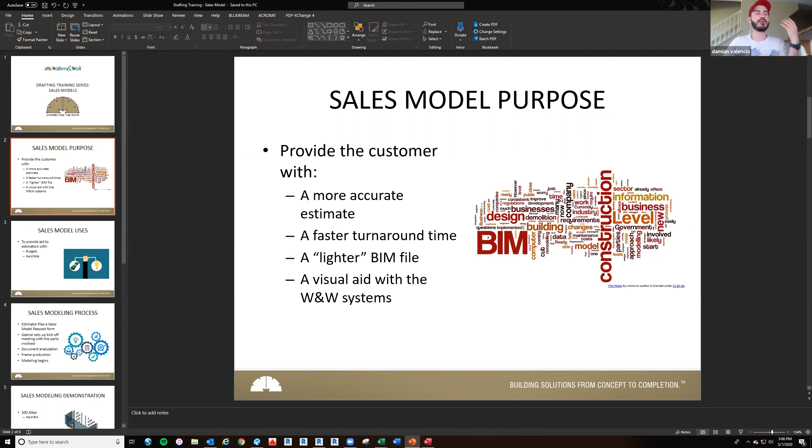Some of the sales model uses I've done: we do this to help estimators with budgets and hard bids. The difference between these two - usually for budgets, right now Saad and myself are working on one for Flower Mart, they just want to know what the price will be. So they care about the square footage per system, the glass and how much square footage, the metal, and all the metal panels and stuff. They just want a raw number.

So we don't really dive into the detail too much. The next one is hard bids - this is the example I'm going to show you. This is when we are bidding for the project, and the architect already has most of the design calculated, they already know the overall idea of the building, so it's almost finalized by them. This is the one we're trying to aim to be better at, because we want to get those jobs. We want to be as accurate as possible and show them that we're capable of giving a good quality product from the beginning, not just at the end.

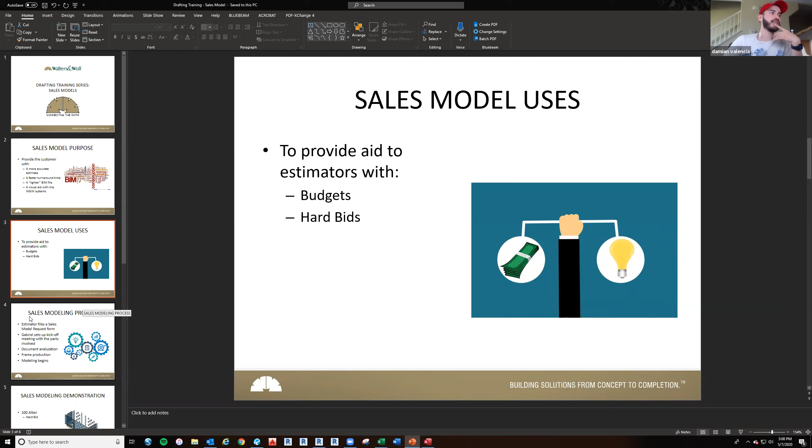This leads to the sales modeling process, which is the process we follow for the sales model. First, the estimator files the sales model request form, and then Gabriel sets up a kickoff meeting with the parties involved, usually a PM, the estimators, myself or whoever else is working on it, Gabriel, and the whole sales team, Amy. We also try to incorporate Jumpstart, whoever is working on those details, because we want to work together from that moment, so we can identify problems ahead of time that we can easily fix later if we find them early.

Then the next thing we do is document analysis. This is where we dig deep into the drawings and make sure we're checking every elevation for any frames that we might need to produce or any frames that we already have in there.

I'll show you an example, going over the steps. The next step is frame production, where we identify all the frames we have and the frames we still need to create. This is where we have our sales team create these frames if necessary, and then we can continue to model.

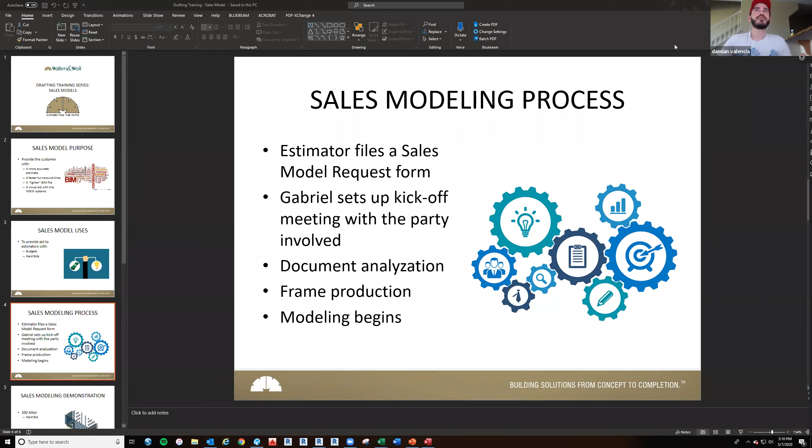Let me show you a quick example - this is 100 Altair. This was a hard bid, but the project's already ours. So here's the 100 Altair 100% DD. This is where we go elevation by elevation and identify the different units that we have.

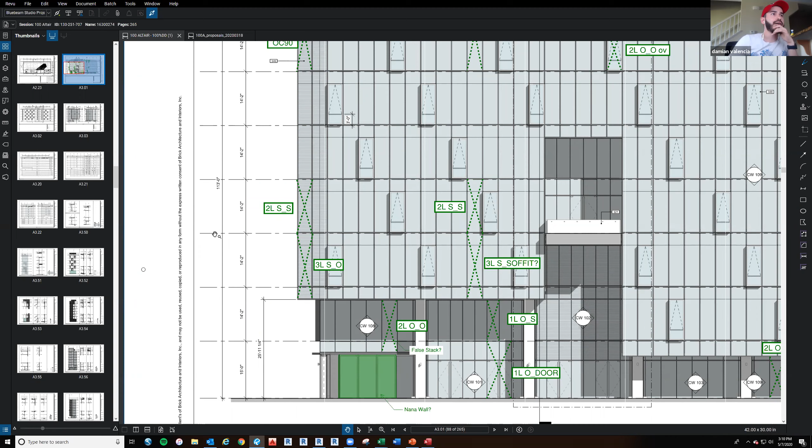For example, here's one I marked up. We identify where we think the stack joint will be, then we cross the units and call them by these names, which makes no sense unless I explain. This is a 3 light stack over opening - we have a stack joint up here, and then an opening down here. This is a 1, 2, 3 light.

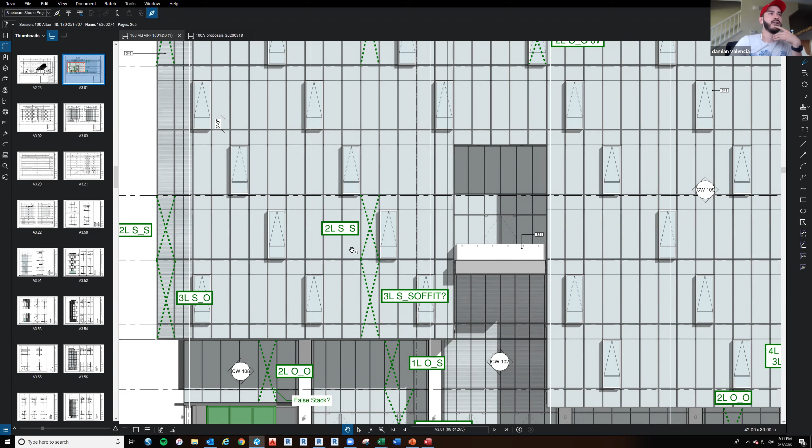There's another one here - 2 lights stack over stack. There's a stack joint up there and a stack joint down here, and then we have 2 lights, 1 and 2. We also go around the whole building and try to find as many as possible. We're probably not gonna finish all of them - we'll probably identify some later once we dig in and start modeling.

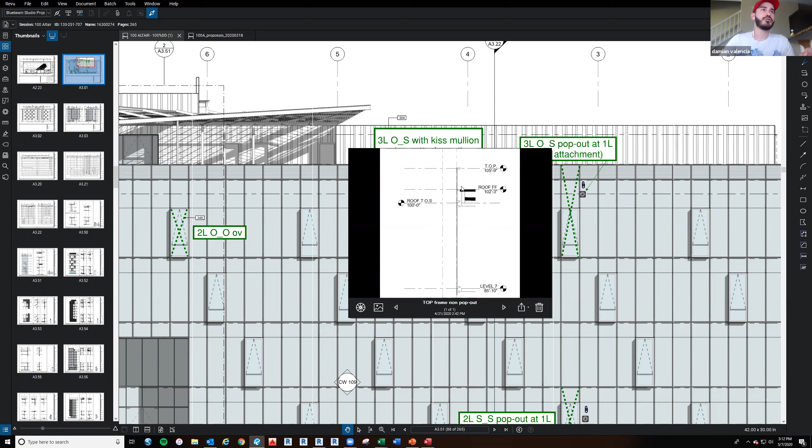An example was this one right here. At first sight, I thought this was a separate light, but once I dug into the proposal drawings, I found out this is actually a kiss mullion. So I put this as a 3 light opening - there's an opening up here and a stack down here with the kiss mullion. Since this isn't a typical frame, I try to include attachments of the architect's profile section view, which shows there's a little kiss mullion right there, and this light runs through.

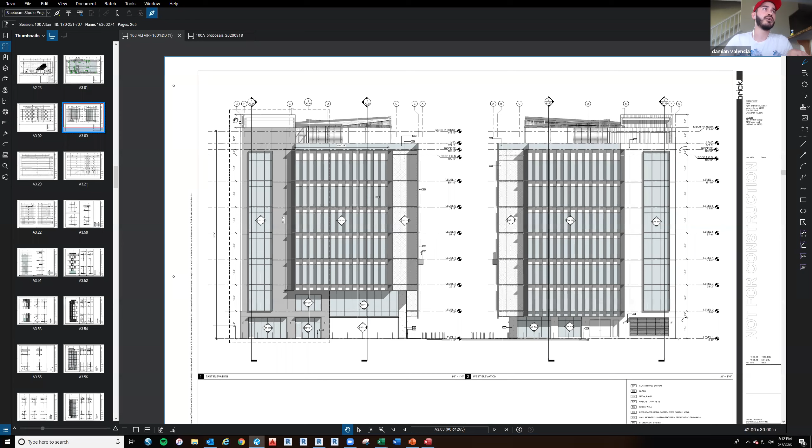So basically, this is what I mean by document analysis. We do the same with all the other elevations - here I skipped them because it kind of repeats the same type of frames around, so instead I just started modeling, which is what I'm going to show you next. This is 100 Altair after I finished modeling the entire building with the sales model frames.

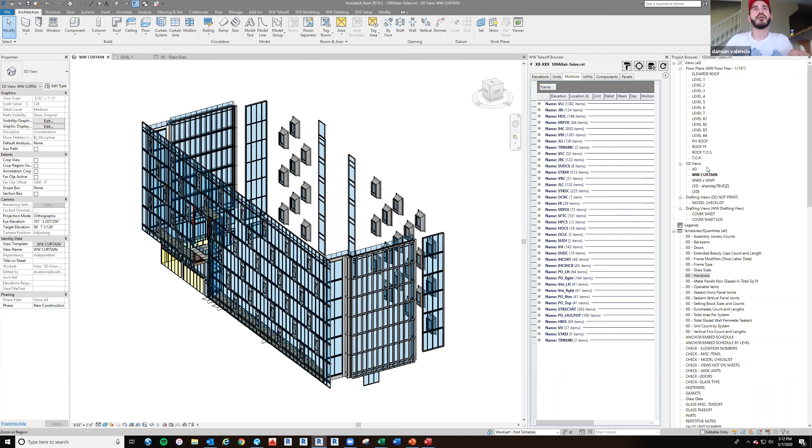It's pretty simple the way we do it, because it's basically a wall with basic geometry, just the profile view of each of the parts. It doesn't have that much detail. If you were to cut it, you can see there's something there - that's because we incorporate an image of the detail on the frames, showing how it's gonna look, but the geometry itself doesn't really do all those little holes.

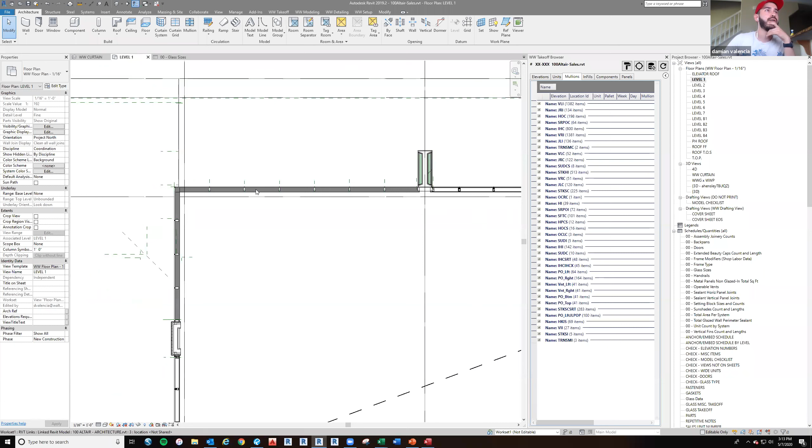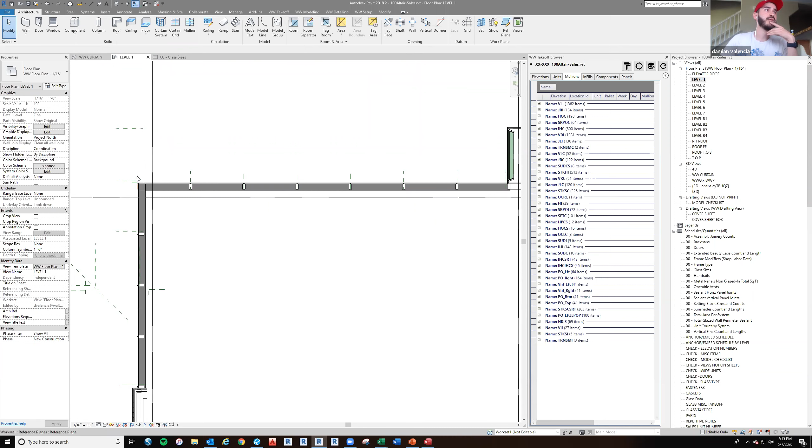So what I usually do here is, once Gabriel showed us last week how to set up the project - once that whole process is done and we acquire the coordinates and have the model linked in, we're ready to model. Then I usually draw my reference planes where my walls are gonna go, and then I just go ahead and draw a wall.

I'm just gonna show you one real quick. I know this one, but it's a strip window, so I'm gonna go change it here to the strip window. This is important because you want to differentiate your different types of windows, because later when you run the Takeoff program, you want to be able to separate the curtain wall from the strip window and the punch openings.

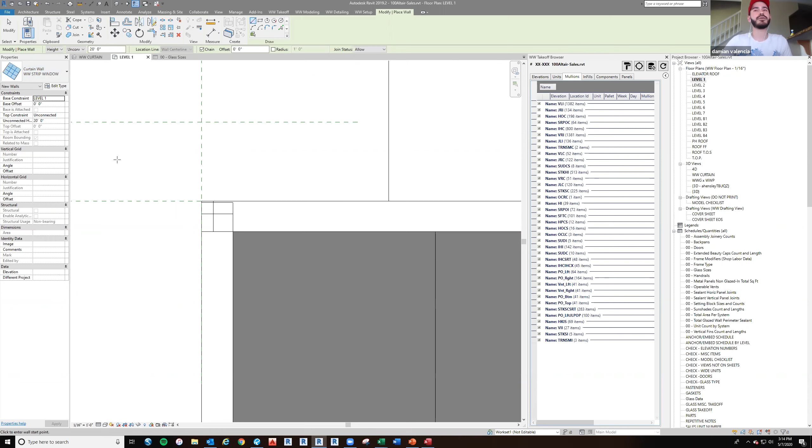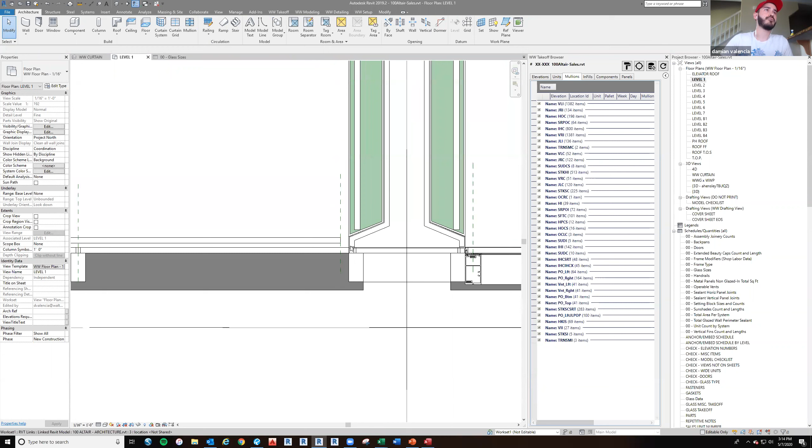So you can give different results to your estimator. So here I go and draw my first wall. I just go all the way over here, and I know that the way the details are, my mullion is supposed to be at the edge. The edge of the mullion is supposed to be lined up with this right here. So I already made this reference plane to do that for me.

So there I have it, this is my wall. So now I'm gonna just include the frame, the frame that I already loaded. So this one was a 2-light opening over opening, and this is another thing.

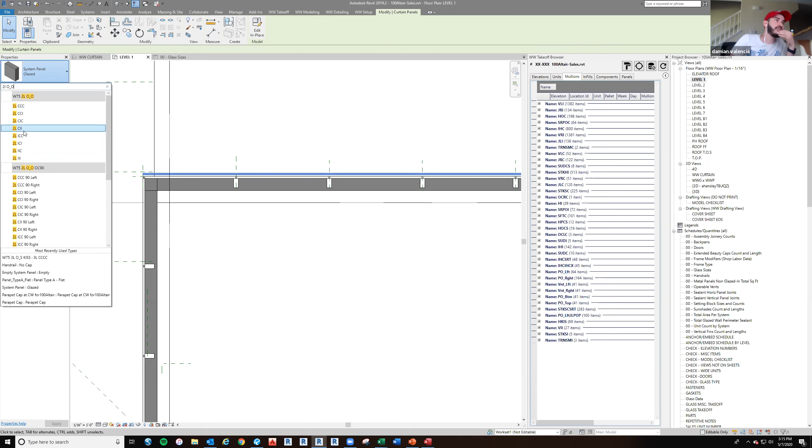So the CII basically is saying we have capture head, inviso, intermediate horizontal, and inviso sill. These are all the different types. So we have all inviso and all captures. For this case, we have a capture head, and then the rest are inviso. So I'm gonna click this one.

And there it is. So now you can see right here, this is the image that I was talking about. It looks like the part's there, but it really isn't. It's just an image that we have.

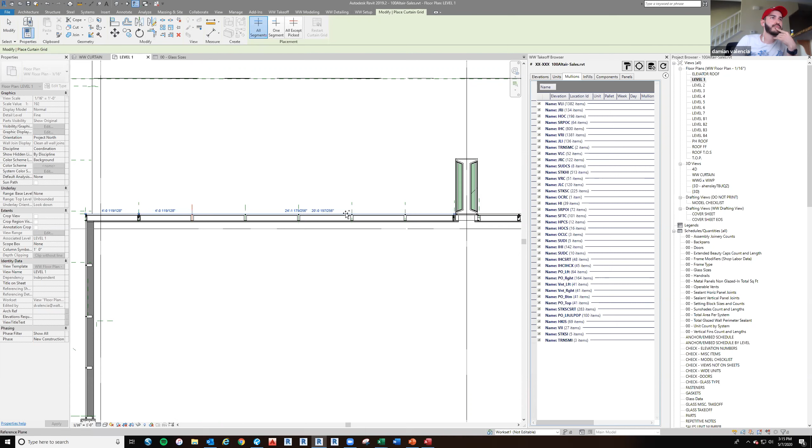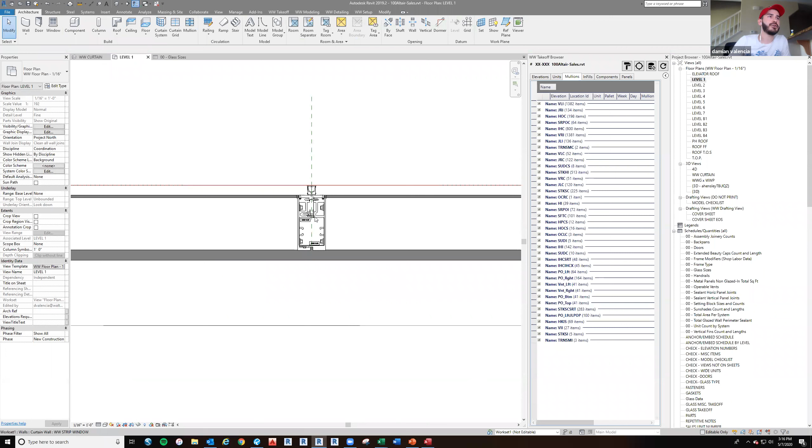Then basically what I do here is just go and cut this apart to create each of the individual units. And there it is, last one. And basically you can see right here, we have both of the intermediate verticals on each of the units.

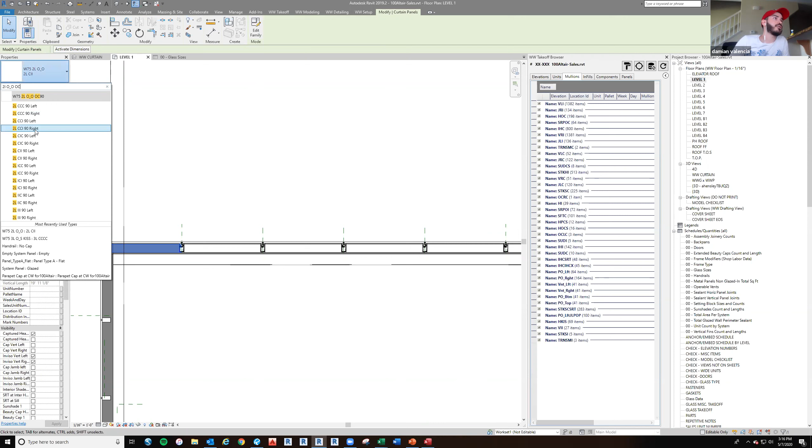I can go ahead and change these right here. For example, this one, it's gonna be an outside corner, so I can go change this to be a 2L opening OC. Here's the outside corner, and then we just find this is gonna be on the right side. So we're gonna do this one right here.

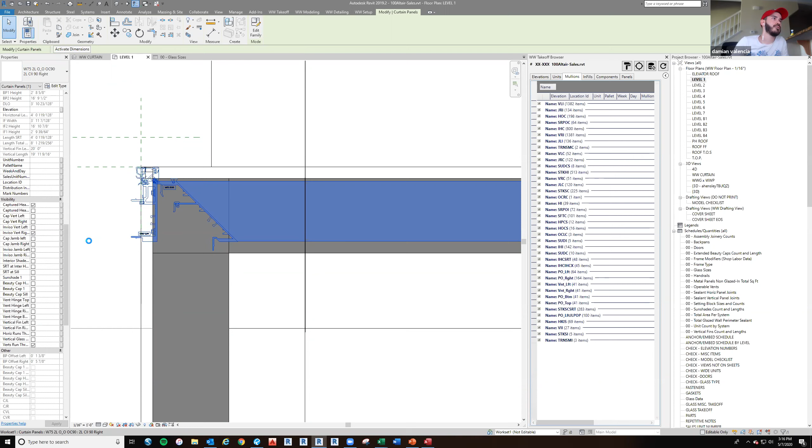And you can see right there that we have the corner. And I'm gonna turn off now that... I mean, I'm sorry, the right one. And there's that part right there. And then we go to this edge over here.

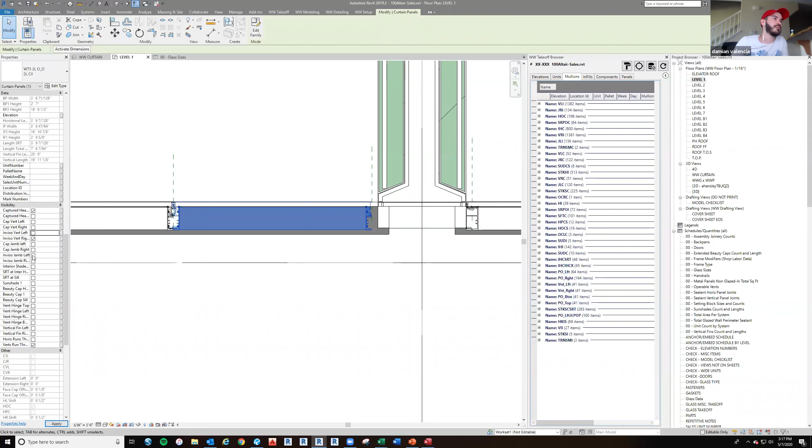And then now I'm gonna put a jamb there. All I gotta do is just turn off the left inviso and then turn on the inviso jamb left. And you're gonna see it change. And there it is, and I have it lined up like my details show.

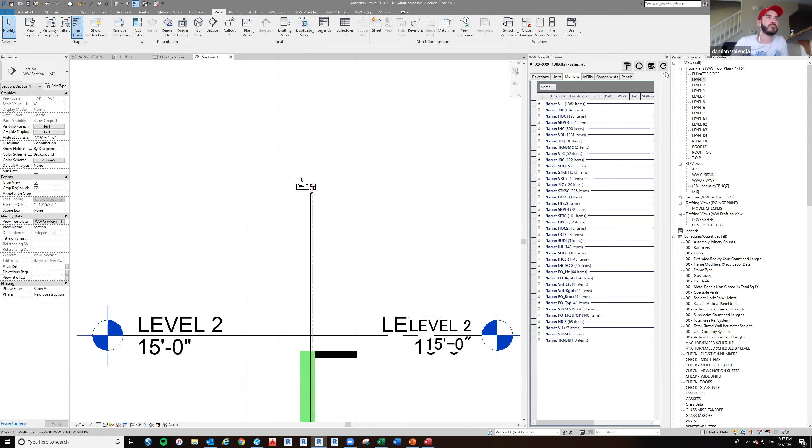Then just to double check, I go here and create a section just to check that my horizontal is in the right spot and that my head is in the right spot. And you see it's not, it's way up there. You can see the head right here. So I have my reference plane and I have to just account for the

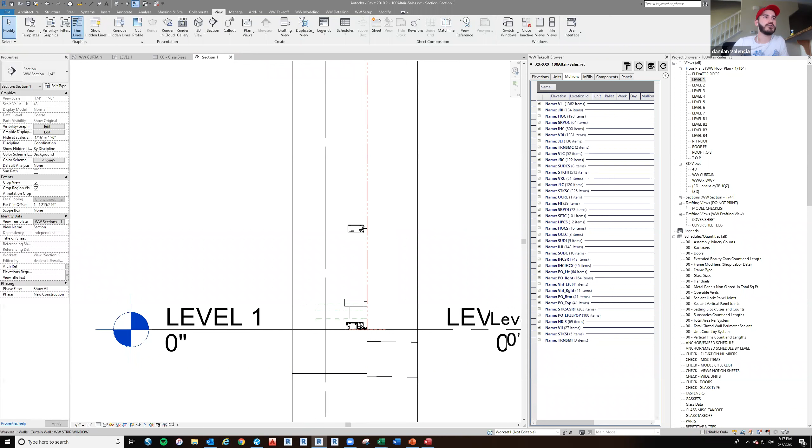caulk joints. So I'm gonna go ahead and click that. I have a 1-inch caulk joint, and just because of time, I don't have much time to show it. But basically, I do have to go through each of the details of proposal drawings or the jumpstart package that you have, and make sure that you are putting the right caulk joints. Then basically, I'm just gonna draw it there.

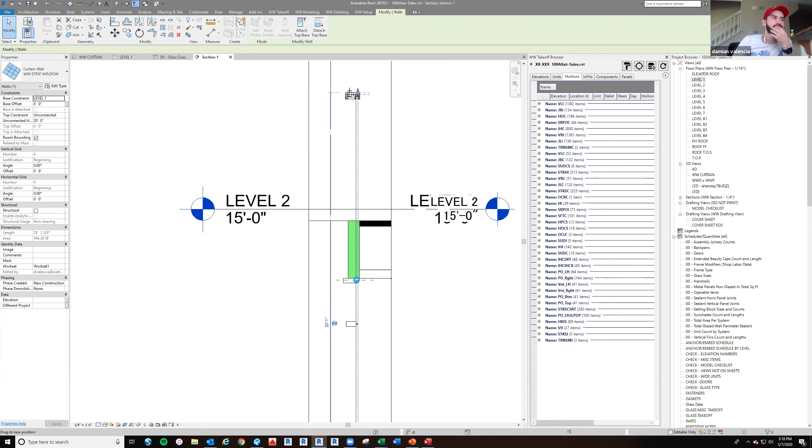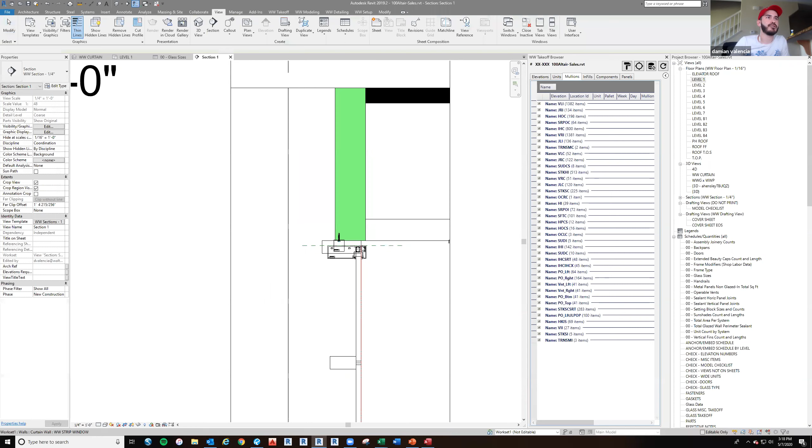Take a little more time because it's basically doing the whole wall. I'm gonna do an elevation view so you see.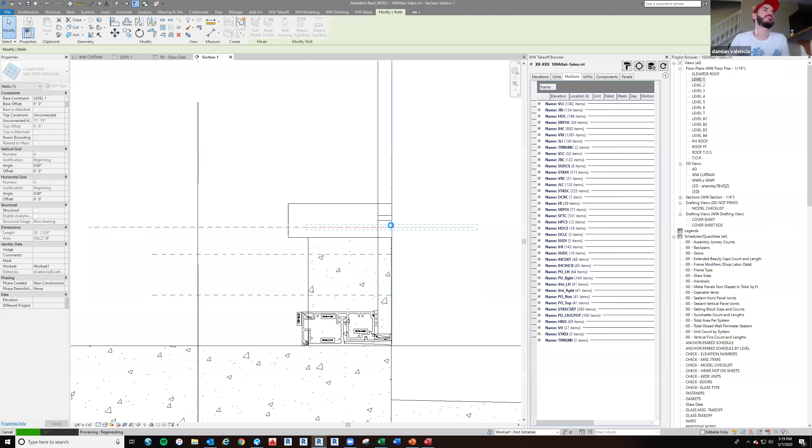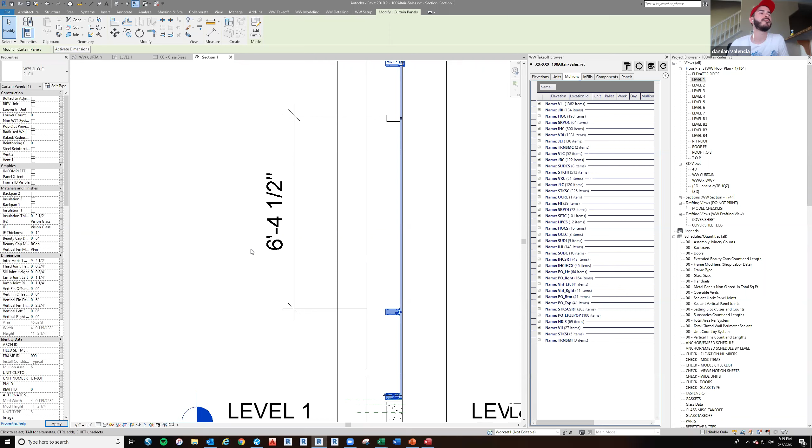All right, so now I can see that my horizontal is not in the right place. Here I can measure and see that I am 6 feet 4.5 inches off. So I'm gonna just add that here, plus 6 feet 4.5 inches. Let's see, so that's a 3 and then that's equal. There you go, and there it is. Now I have it in the right spot.

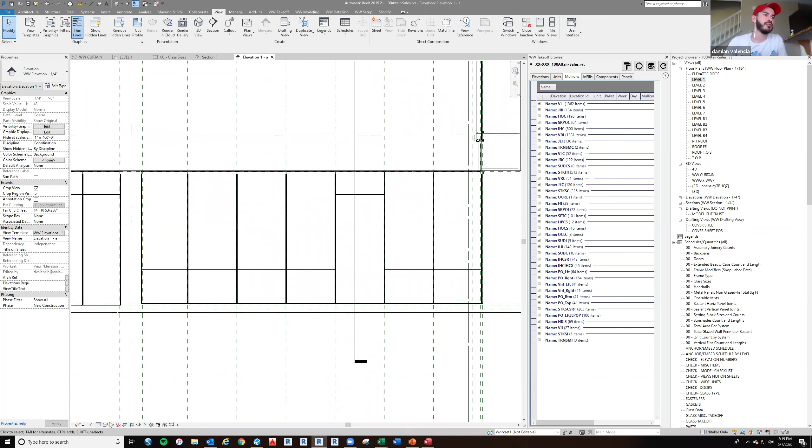There it is, and now I'm gonna do an elevation view here. And you'll see, since I had already cut the units apart, it only made the change where I had the section. So I usually just do match properties and that's done.

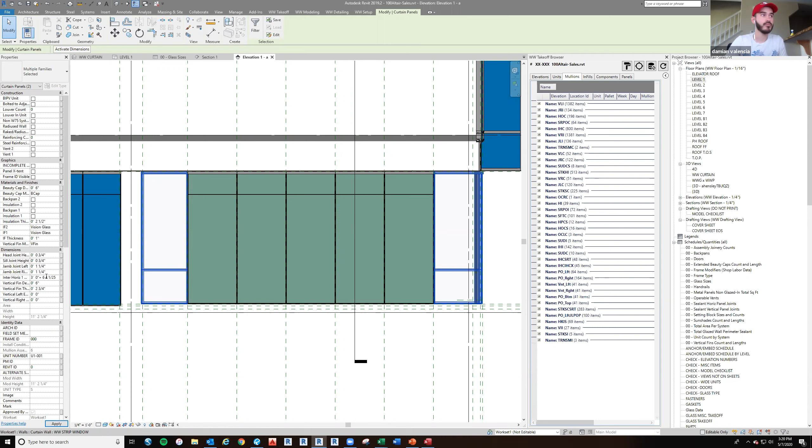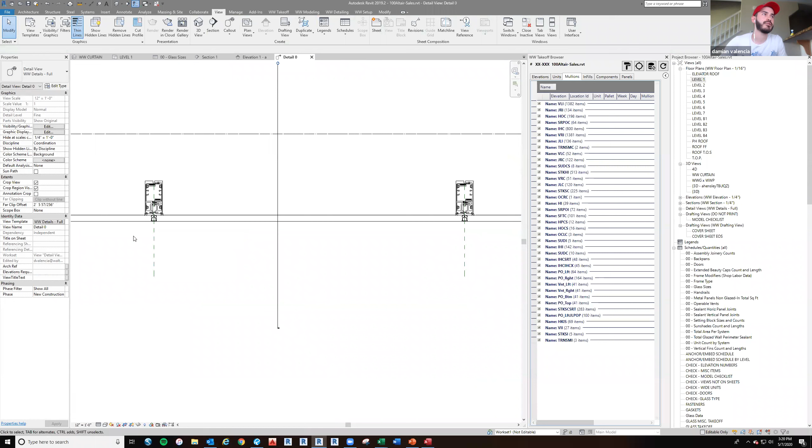And there it is, so basically now we have the wall. If you were to cut a detail view here, you'll see each of the parts. I don't have time to explain the frames, but the frames are basically just gonna be the outside shape of it. It doesn't have all these little holes cut out, it's just a picture, but you can see each of the parts here and it looks pretty cool. So it looks like it's finished.

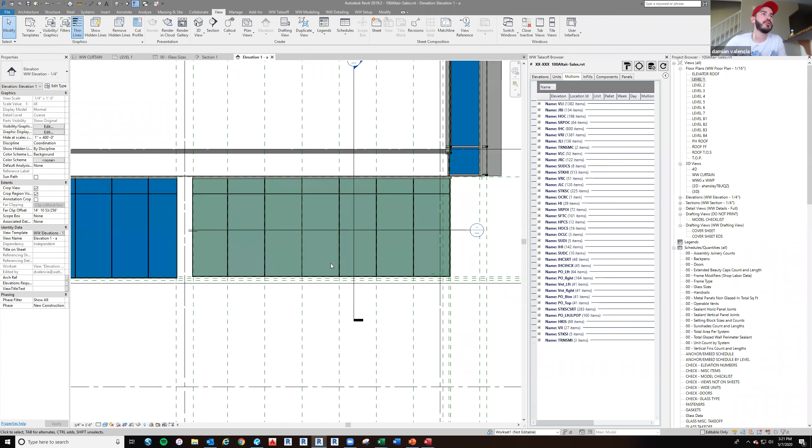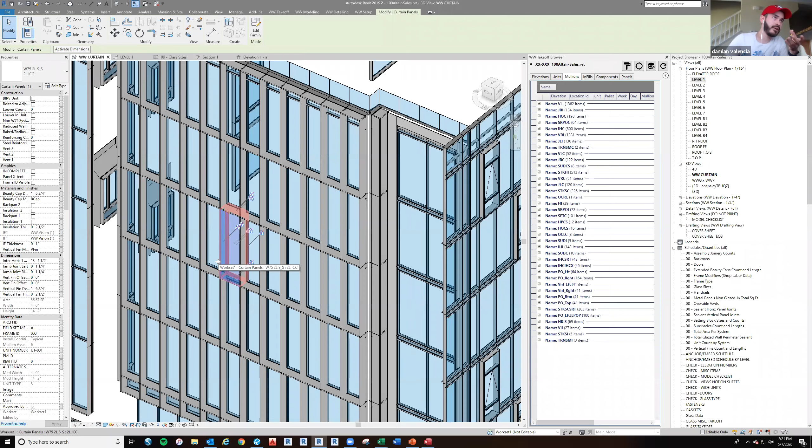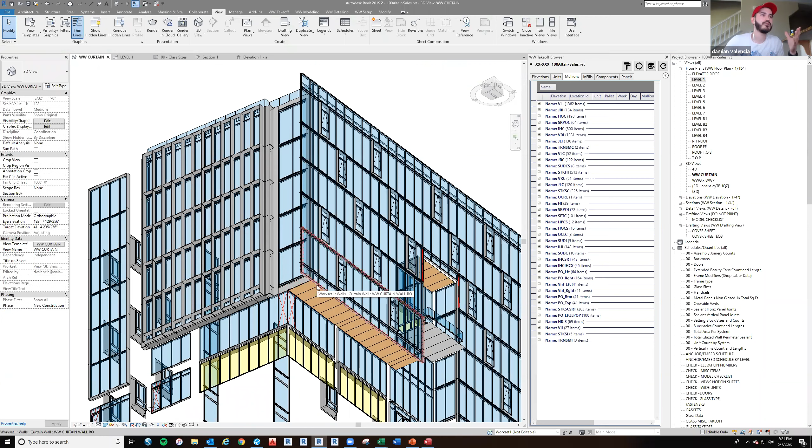So yeah, we basically go through the whole building and that's how all of this is built up. We also have some parts where all the frames have a chance for you to include the sunshades and the parapets, and we have parapets right here. So we have different frames - here's a parapet frame, and we also have soffit frames, for example, right here, that we use for soffits. That's how everything's created. We just create a wall, and then we just include whatever frame that we want to put in there.

Yeah, and then once the whole building is completed, that's when the second part of our system begins. But does anybody have any questions so far?

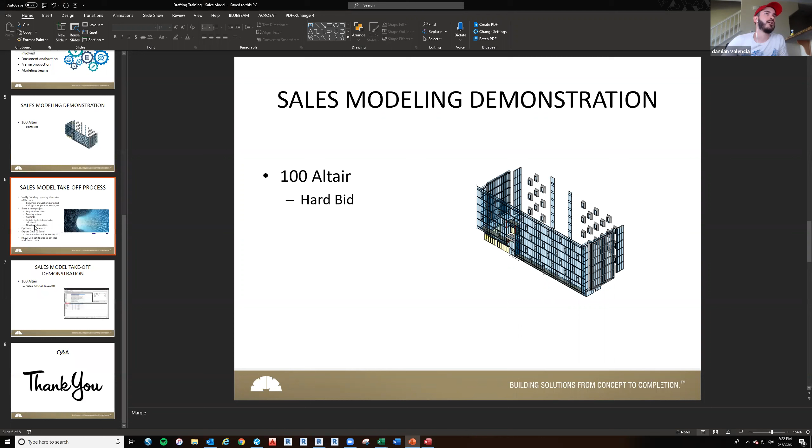Okay, all right. So the last part of this is basically when we do the sales takeoff process, and this is a process that is important because this is where we get the data that we will be showing our customer. This is where the numbers come out. So we want to be very careful.

So the first step that we do is we want to verify the entire building by using the Takeoff browser. What that means is that Takeoff browser that you have in Revit, you basically use it to double check that you have the right parts, that you have called out the right elevations and all that. Then I'm going to show you that real quick right here.

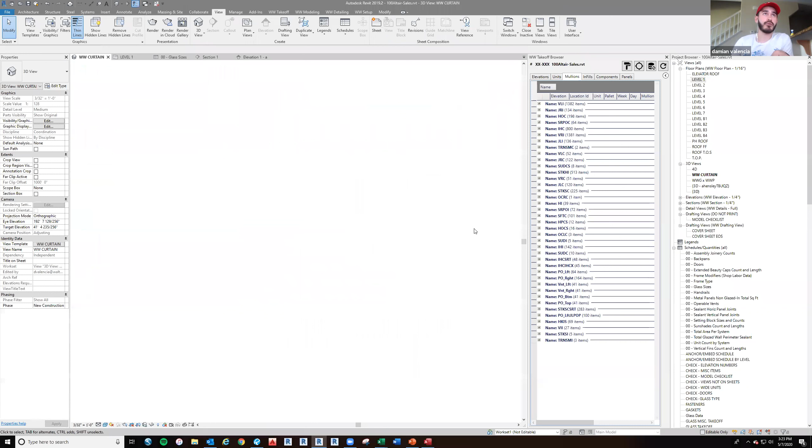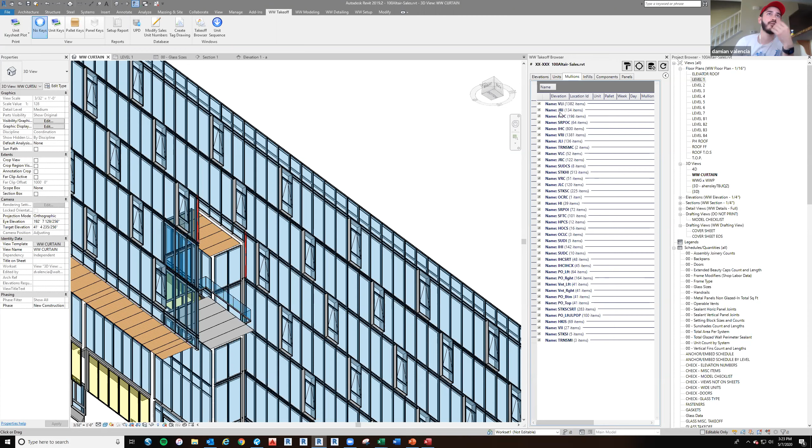So basically, since this is a hard bid, I care about having the right parts and the right aliases in there. So I use the Takeoff browser that we have over here on the Takeoff, and then Takeoff browser. I want to make sure that all these VLI, JRI - what each one of these are. This is the alias of vertical left infill, and then jamb right infill, and these are all the different aliases that we have for the parts. So we want to make sure that we have the right ones.

For example, like right here, we have a parapet. So we want to make sure that the alias says that. So this one is HPC - that means head parapet capture. So this is good to go.

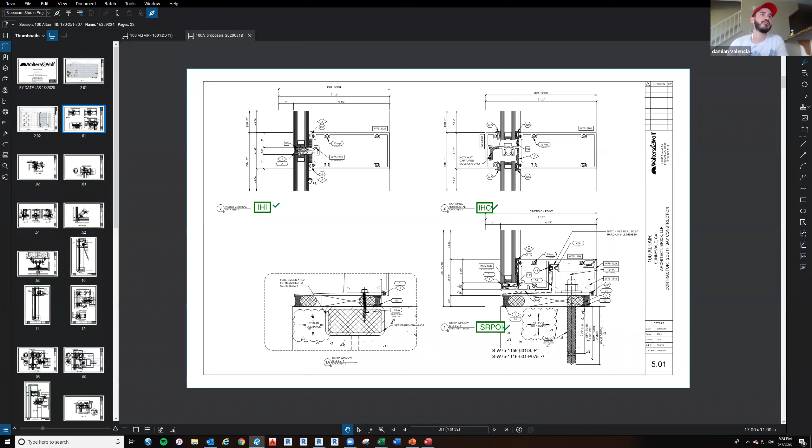So basically, we go through each one of these aliases, and then we want to associate those with the details. Let me go ahead, for that HPC, let's go right here. So we have that this 1 on 6.08 is assigned there. So we check it, and then okay, so this is a head capture and then has a parapet, so this must be an HPC. So we say this is HPC.

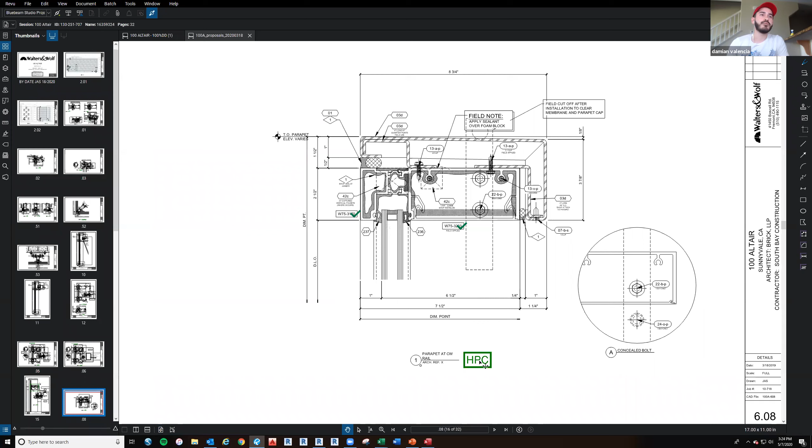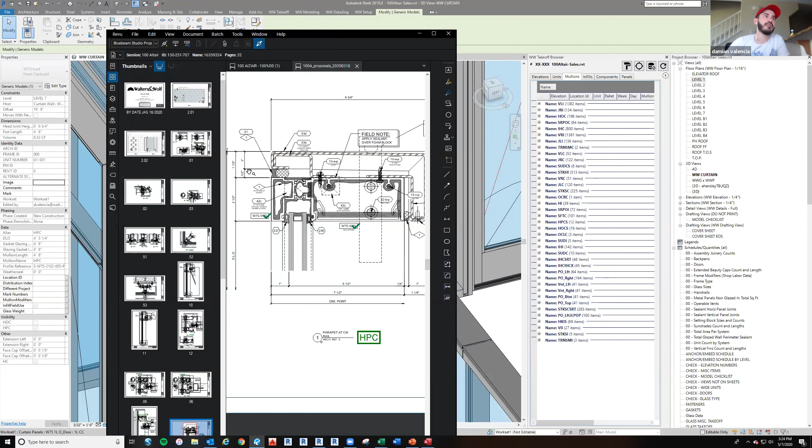And this is important, to match the right aliases with the right details, because this is where we're gonna come and double check that we have the right parts in our takeoff program, so it knows what to read when we run the program. Yeah, so we go through each one of these aliases, and then we match them with each one of these different details and double check the parts.

So yeah, that takes us to the last little bit of it, which is just when we let the machines work - we do a little bit of pre-work ourselves. This is where we start the project on the Takeoff program. We basically include the information of the project, we edit the framing systems. Basically, that's where we say okay, we have tech wall, we have W75 or any other system, and we identify it there. That's where we put all the parts and all that stuff that are missing.

We run UPDs to update that information into our Takeoff program, and then we also go and tell the Takeoff program which areas we want to be calculated. So it can calculate all of them, or if we want to get specifics. For example, for this example today, I just did the curtain wall for that building because we have punch openings and strip windows, and we have guardrail, and we have soffit and all the things.

But yeah, so basically we tell the program we want you to read just the curtain wall, or basically tell them what to do. And the last thing is the elevation information - that's where we tell the program, okay, so for those areas that we told you to calculate, I want you to assign these systems into those areas only. So what it does is basically driven by the aliases that we assign to those parts in the Revit. It reads it off the parts, the aliases that we have in our...

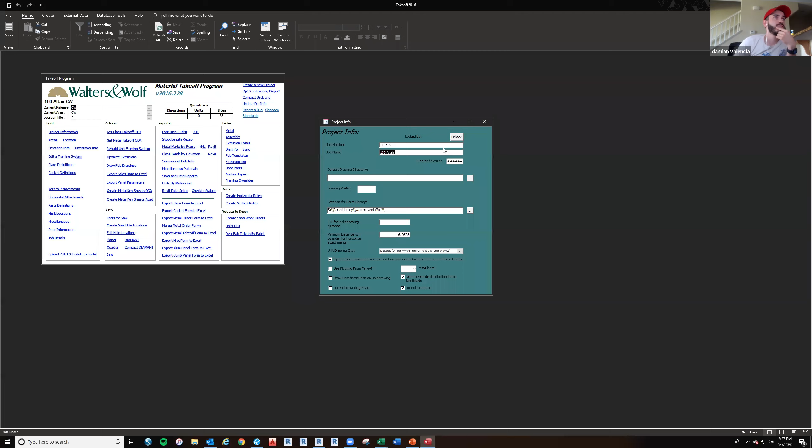So here's what the Takeoff program looks like, if you guys haven't seen it yet. Basically we create a new project, and this is where we enter the project information. We put the name and the job number so it knows what to look for.

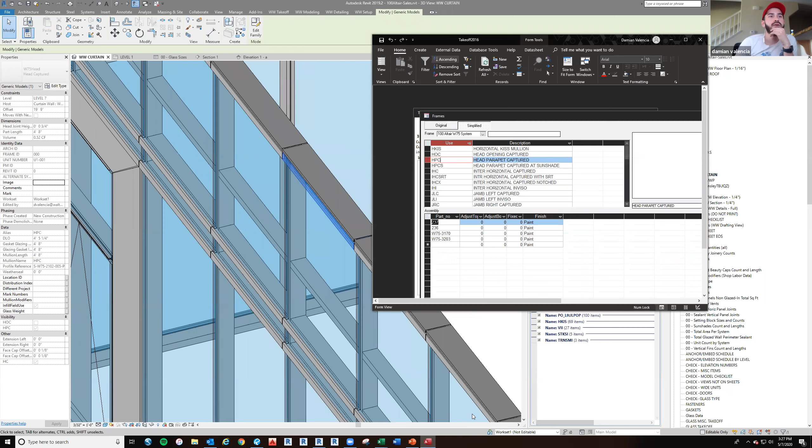And then we go down to the framing systems, and this is where those aliases are important, because we can see right here HPC, head parapet captured. We want to make sure that HPC has those parts in here. And I can see that I have 3170 and then 3203, and then I have the gaskets and all the other little parts.

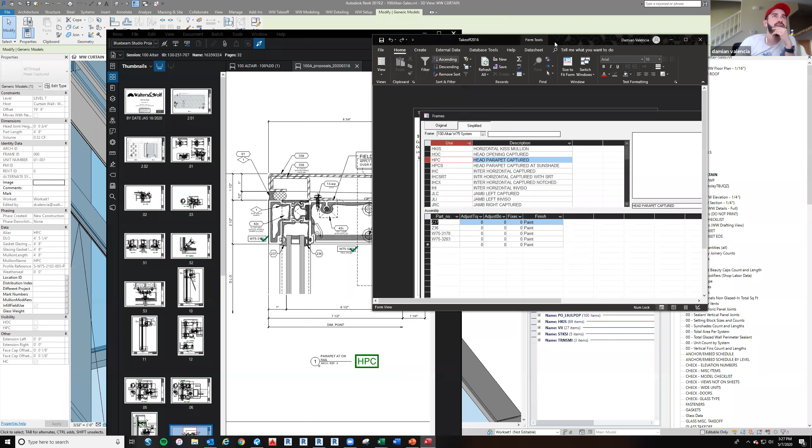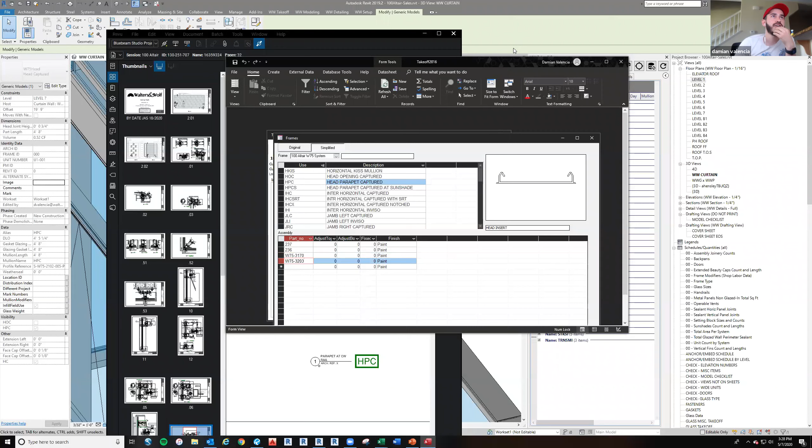But we mostly care about the W75 parts. I tend to write the gaskets as well, but that doesn't really do much for us at this point. So you can see right here, I have the W75 3170, and you can see a little preview. And then we have the 3203. So basically, yes, this checks out. So I go and put the checks there, and that's done.

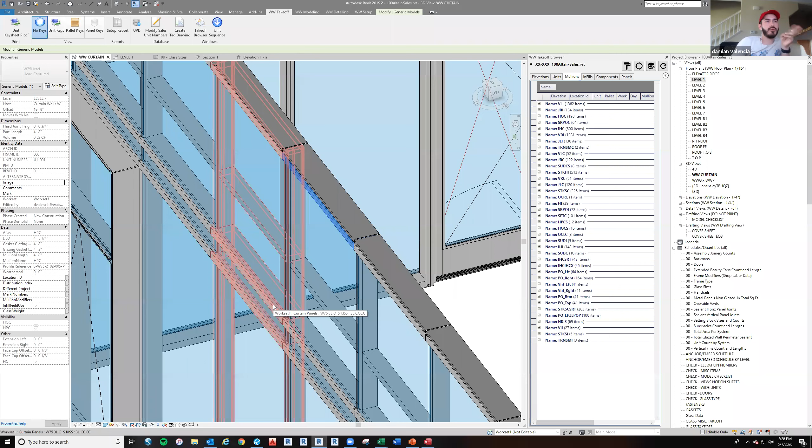So that is how we edit the framing systems. Once we go through each one of these aliases, we go through all the parts, all the proposal drawings that we had, or the Jumpstart package 3. That's when we are able to run UPD, and this will allow the Takeoff program to read those aliases and match them with the ones that we put in the Takeoff program.

And then also this is where we tell the program, okay, we want this area. For example, right here I have curtain wall. So we say the area and what group does it pertain, and we just put curtain wall. This is where we tell them, okay, I want you to calculate these areas: guardrail, punch openings, soffits, and strip windows, and any other. You can also do all of them at the same time, or do it on all systems.

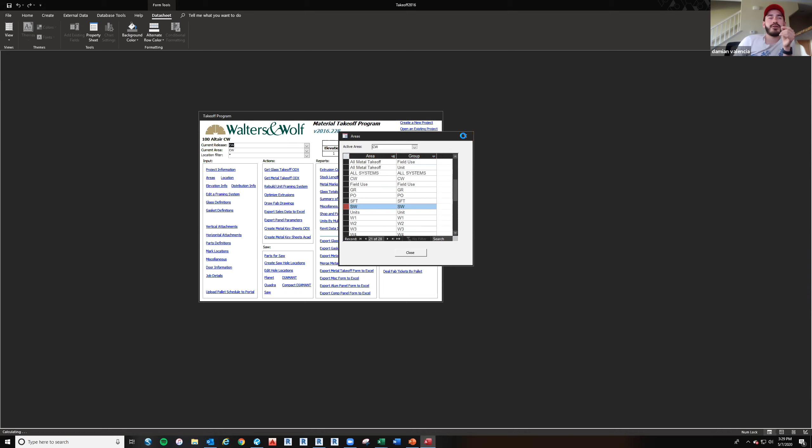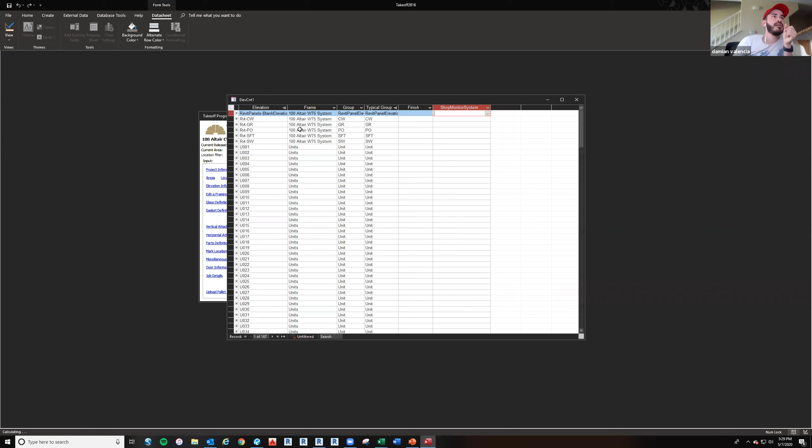And then the last thing you can do here is the elevation information. This is where you tell the program, okay, I already told you which areas I want you to calculate, now I want you to assign that system that I created for you. So the 100 Altair W75 system - this is the system that I created, putting each one of the W75 parts, the aliases matched with the ones from Revit and the ones from the program.

So once that happens, then we allow optimized extrusions. What it does is basically generates all the part sizes, the lengths, and automatically does it for you. I'm not gonna run it because it takes a little long, but this is the end of it. This is basically where if you get no errors, you're done. You export the data to Excel, and it looks something like this once you export it.

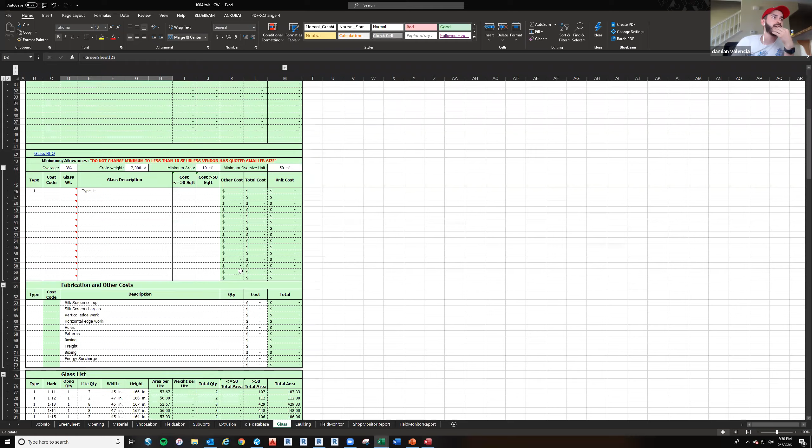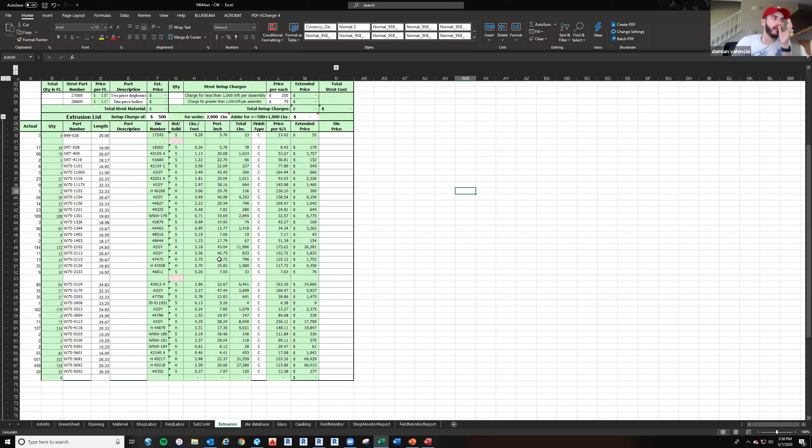So basically right here, we have the extrusions. This is all taken from there. It reads all the parts, and then it shows you the quantities, the lengths, and also the die numbers, and then all the prices. If you add a little more over here, you get more data. But this is the end result that we have, and this is what helps the estimators estimate their numbers.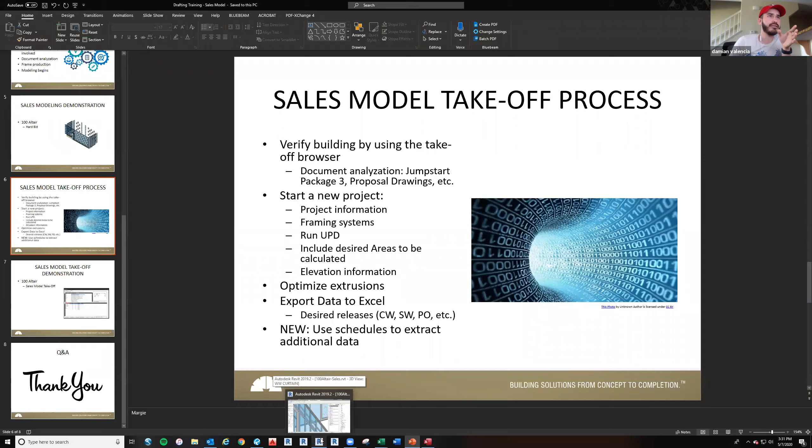But one of the new things that we are trying to do is the use of schedules to extract new data. This is something new that the sales team has been working on, and basically it's a preset schedule that I believe Amy worked on. These are actually very useful - one of the schedules that I'm going to show you is going to be this one.

I have it open - glass sizes. So for example, for this one, I have metal panels, walls, so they're stainless steel or whatever. I guess I assigned that one to that, that had vision glass. So basically, what we're trying to do in the future is move away from these Excel sheets and stick with the schedules, so use the full power that Revit has.

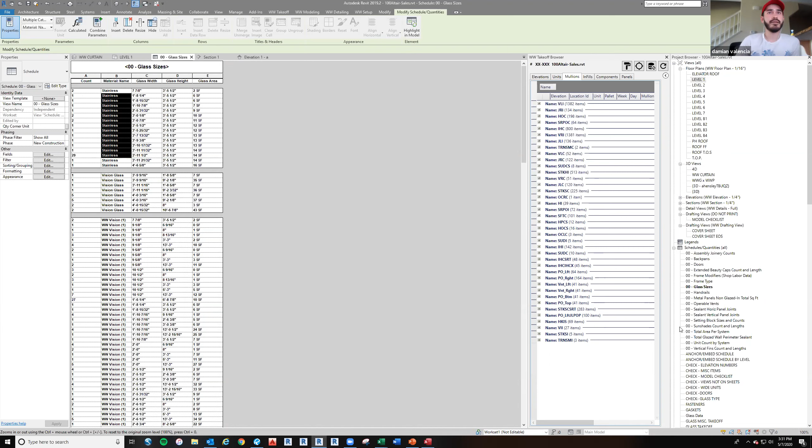And you can do many things. For example, I have handrail right here - it shows you the linear footage and the square footage, and also if I were to assign a material to that, it'll tell you right there. You can do the vents if you had any, the doors - it shows that there's 3 doors, and then it shows you the type of doors. Back pans if I had any in there.

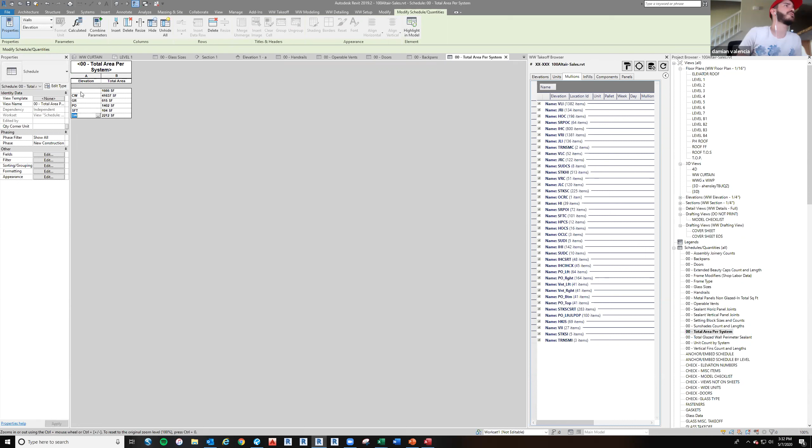Basically, this can be done for many different things. Here's the total square footage per system - so we have curtain wall, guardrail, punch opening, soffit, and strip window. And apparently some of this that I didn't assign, I believe this is the panel wall that I didn't assign anything to. But yes, that's basically the whole process for the sales modeling. I don't know if anybody has any questions.

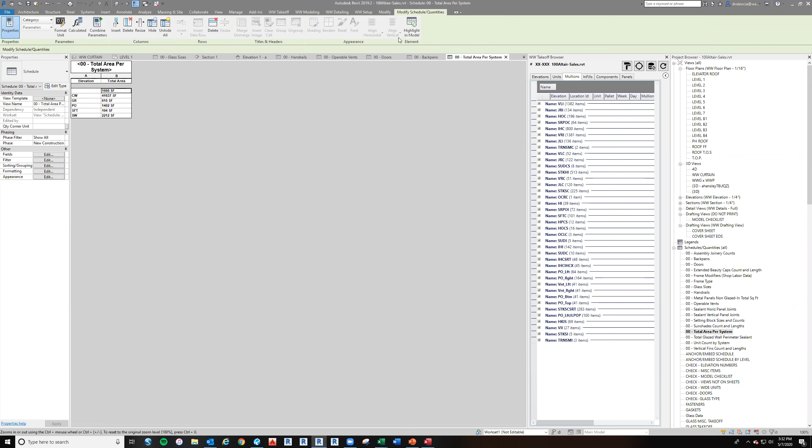I was wondering, right now we use the sales model for reference when it goes over to the drafting side. At some point, are we going to be able to use this and just build off of it versus redoing it over on the drafting side? I think that was the goal we were aiming for.

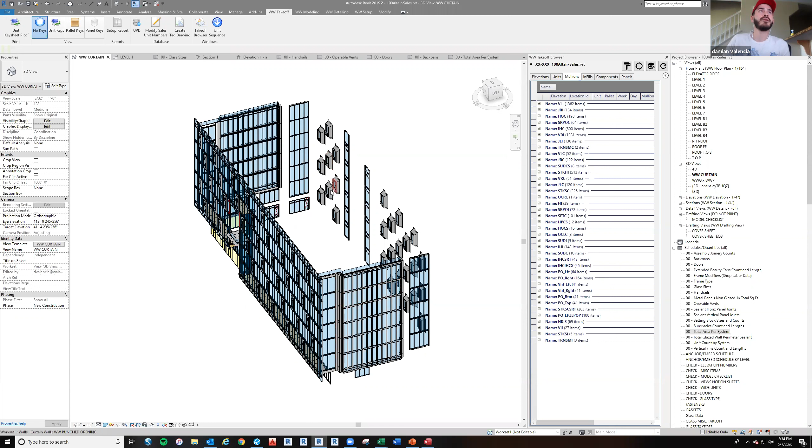Right now, Damian, the schedules you're producing, the new ones Amy's putting together, how does that data get into the estimates? Oh, I didn't show you that because it's still kind of iffy, but basically there's, let me show you real quick.

Yeah, we're trying to, I've done it a couple times. There's a dynamo routine that Amy produced, and basically what it does is take this data you see here, like the schedules, and puts it into an Excel sheet. Let me actually open one here.

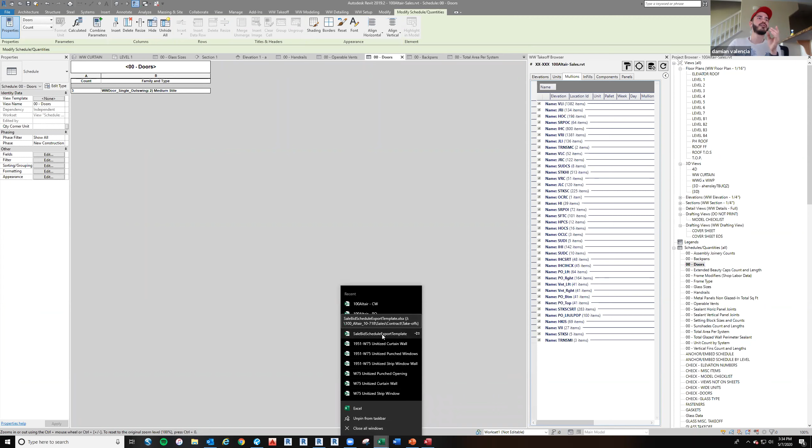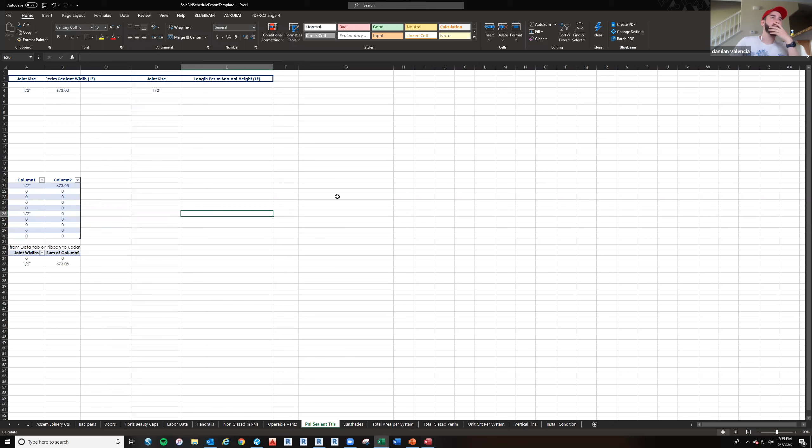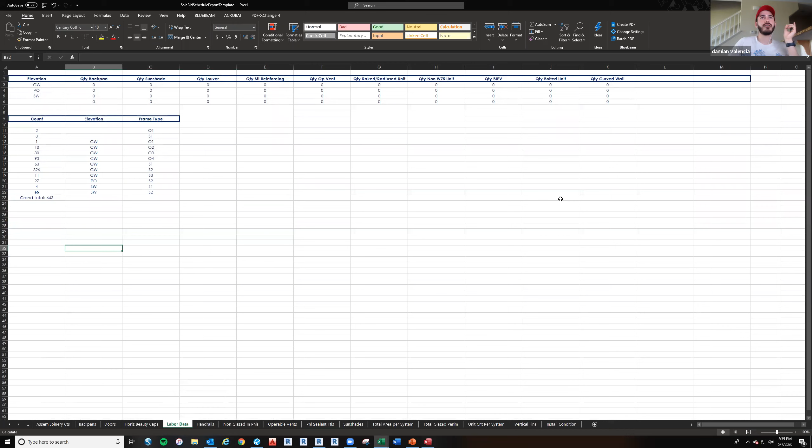So this is what Amy has been working on. Basically all those schedules get transferred and put into one Excel sheet using a dynamo routine that she created. It's right here, managed. So it's a super easy one.

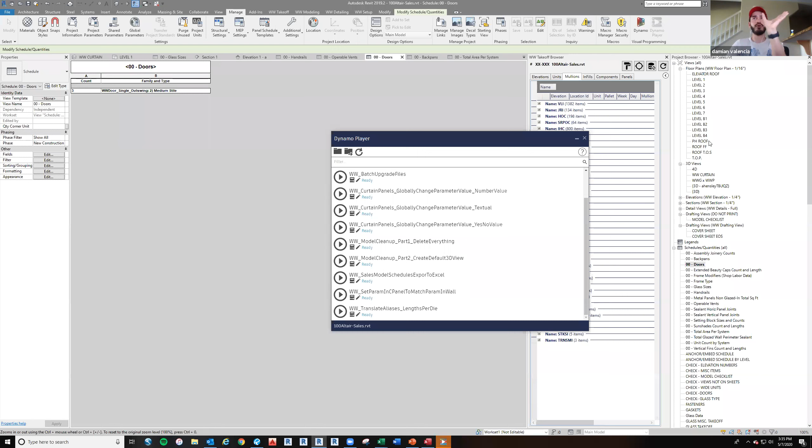I love it, it's literally one click, right here. As long as I have that Excel sheet saved within that folder, I run this, and it imports all the schedules into that one page. So you don't have to be digging through each schedule, you have one page where it's all in one place.

That's the other thing that's still being tested, but we've done it, I've done it twice I think, for two projects. Currently we'll run this and provide that Excel sheet to the estimator, and they'll take whatever they need from it to put in their estimates.

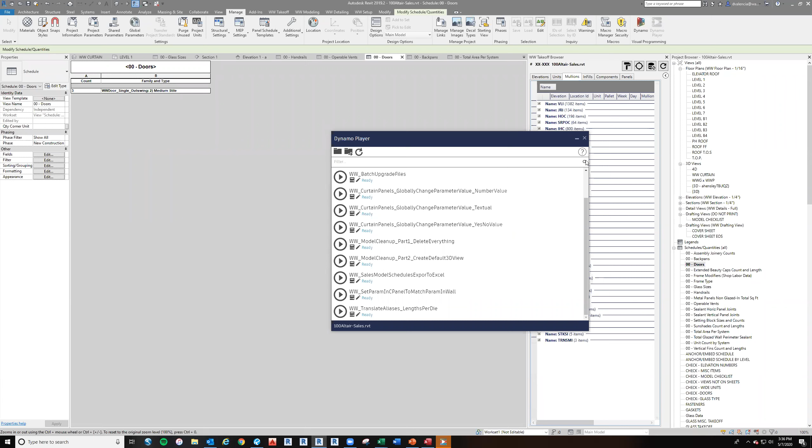That's how we're actually doing it now. We'll give them the sales template with the extrusion data and the glass, and we'll give them this Excel sheet with all those different tabs at the bottom. We provide both to them, and they're the ones who determine putting it into the actual estimate sheets.

Well, great job walking us through it. Thank you. Hopefully this answers some of the questions, and hopefully we can move forward with this even more.

We've done so far. Yeah, really cool stuff. We're getting there, looking good. I know, about three years ago. I know, right, exactly. Yeah, we've moved a lot since I started working here. It's been two years, two and a half years, I don't know, two and something.

And Lisa, they will tie together eventually. We're working on a few things to kind of bring that all together. That would be good. Got to work out the kinks first, though.

That's for sure, and it was one of those things where you needed to be able to move quickly. As you can see, there's a lot of data to get to the sales group and things like that. So we wanted that to be able to move forward without being hampered by a whole lot of development cycles, letting them get their thing done and get sales used to it.

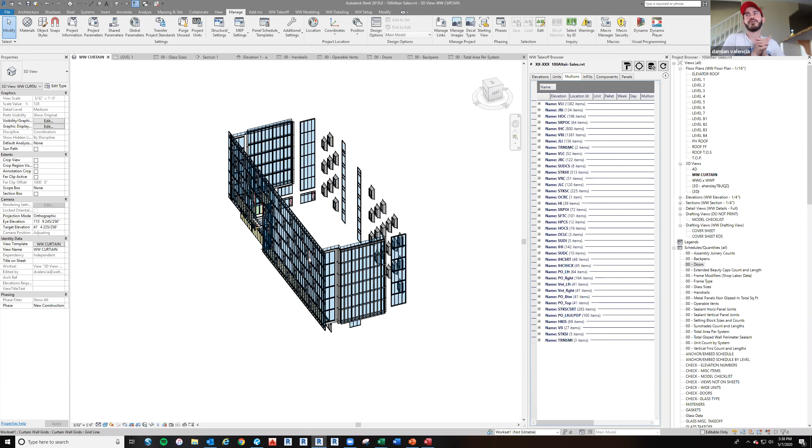All right, that's all from me. If you guys don't have any questions, then that's it. Nice job, brother. Thank you. Thank you, Dave. Thank you, Amy. Thank you, guys. Thank you.